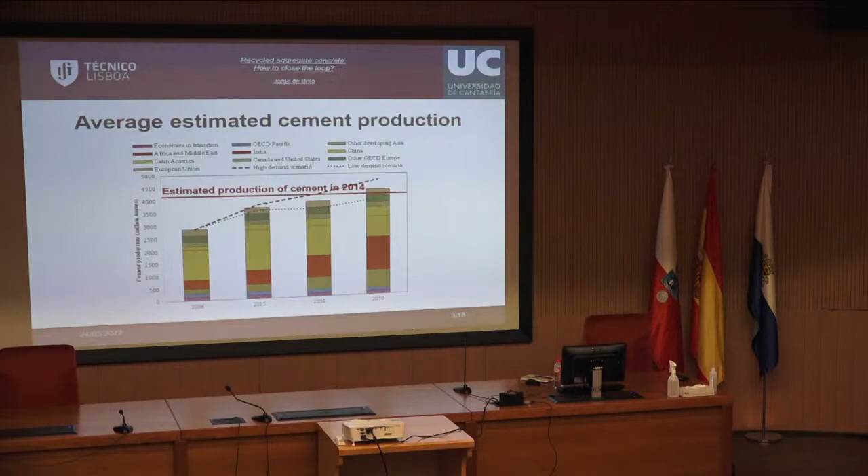This was the estimated cement production in 2014. As you can see, these estimations failed, and the real cement production is going to be higher than the worst predictions here. So we are expecting to produce even more cement than before, beyond all predictions, unless we do something about cement. That's why I mentioned the possibility of replacing cement with binders, ligantes, that have a lower environmental impact. That's something we have to think about.

Going back to aggregates, we see similar trends. This was a prediction, and as you can see, the necessities of aggregates are going to increase over time, with most of the bulk not coming from Western Europe, which is more or less stabilized, but mostly from China. Africa is going to also grow. So this is something we have to understand, that it's going to increase. Even though aggregates, in terms of environmental impacts and even costs of concrete, are relatively minor, they are still very big. So we also need to do something about that, and that's what I'm going to talk about.

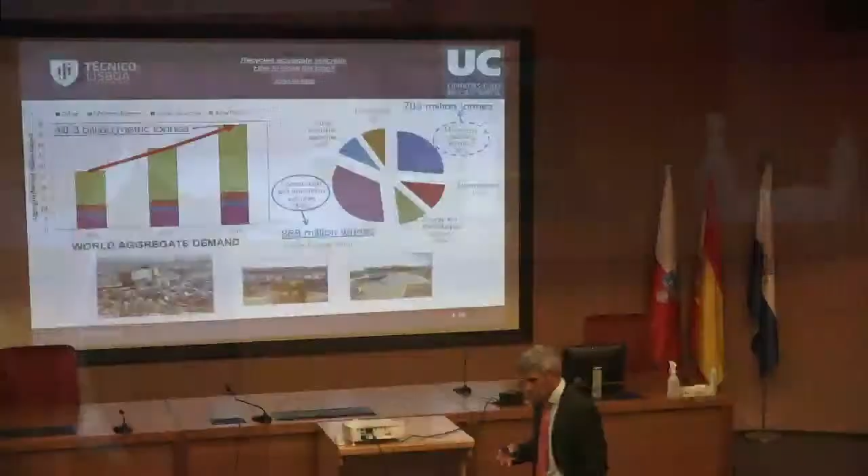Another issue I'm going to concentrate on a lot during this presentation is construction and demolition waste. Everybody knows what construction and demolition waste is, but what most people don't know is how important it is. Why? Because we keep getting lots of information about other types of waste, which are much more polluting than construction and demolition waste, and therefore get more attention. However, as you can see, the highest percentage of all waste comes from construction and demolition activities: 34% of all waste produced by humanity. Furthermore, mining and quarrying activities, quarrying as las pedreras, canteras, are responsible for another 27% of waste. So construction is really responsible for a lot of waste.

And should we use this waste to reduce the consumption of natural aggregates? Of course. Are we doing that? Well, no. That's what this conference is about. We are not doing that. We are not using in an effective way the huge amount of construction demolition waste that is being produced to reduce the necessity of using quarries.

Then we did this, which was a characterization and quantification of recycling processes. We looked at many recycling plants, and we made a comparison of methods, of the output, of the energy, of the actual quality of the materials they provided, and we did that for a number of recycling plants in Portugal.

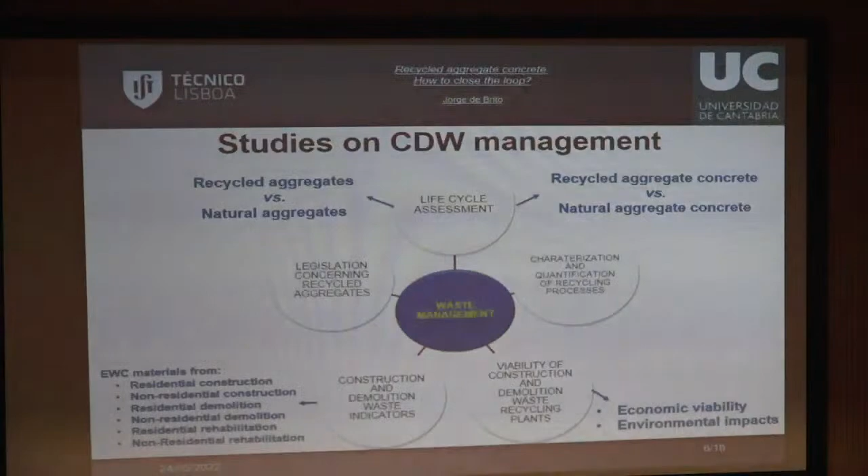We also did this study, which was very interesting. I think I have a couple of figures from that study, which was a study of the viability - do you understand viability? Well, it's almost the same in Spanish - so it's the viability of building a construction and demolition waste recycling plant in the area near Lisbon. So we concluded what was the best spot, and then we made an economic viability analysis and an environmental viability analysis.

We concluded that if we could put the recycling plant at full power, it would be a great idea in terms of costs, because it would pay off in 3 to 5 years, the whole investment, and in terms of environmental impacts it would be very good. It was never done. It stayed on paper and never went forward.

Then we also did - this is not in chronological order, these studies I have not been describing chronologically - we did a study that I have not seen before nor after, which was a study in which we built construction demolition waste indicators, for different types of construction: residential, residential office, and what was the other - I can't remember now. We also did rehabilitation, demolition, and construction, different, and we also analyzed, for example, whether the constructions were made of concrete, timber - madera, timber - stone, etc. And we provided indicators.

So then the main area in which we worked was this, as Professor Carlos Thomas said. We did lots of works in recycled aggregate concrete. Recycled aggregate concrete is not only concrete made from crushing concrete. This, of course, is the best solution. But in practical terms, we rarely get it, unless we use the waste from a recycling precast concrete plant. You understand? Prefabricación. Outside those places, normally concrete is not separated from the others. So most of the time we have these mixed recycled aggregates. We can also have separated masonry aggregates from bricks or from tiles. And we did that as well.

And we also did other materials. Some of them are obviously not the most adequate, such as plastic and rubber. The results are interesting. For example, rubber, it looks as if it will not work. However, it can provide some interesting properties in terms of the ductility. In seismic areas, it could be interesting because the rubber functions in such a way that it accumulates some of the energy from vibrations. So it could be interesting.

Glass is an excellent material for concrete, if we take into account the alkali-silica reaction. Do you know what the alkali-silica reaction is? It's a chemical reaction in which the alkali in cement react with the silica from the glass, and what happens is there is an expansion, and the silica turns into gel. So it's not very good for concrete. It cracks concrete and also makes it weaker. So as long as we have some care with that, it's a good solution.

And finally, we did an interesting study that I'm not going to present this time, Carlos, which was about using waste from the marble industry. Actually, we used all wastes from the marble industry. We used the coarse aggregates that result from broken pieces of marble that are not used. We used the fine aggregates as well, and we used the sludge. When cutting the stone, the dust becomes mixed with water, and they have these huge mountains of white dust which are not used for anything. And we investigated that, and all of these materials are viable to make concrete.

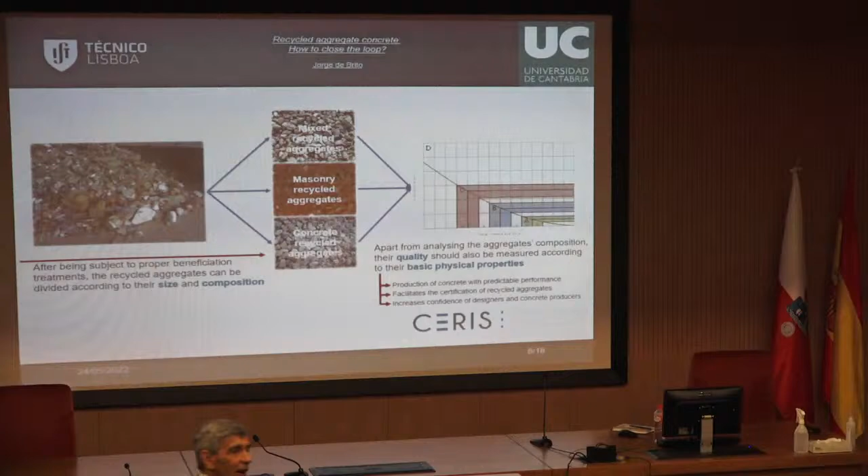Now, from this research, I'm going to highlight here a couple of cases. So what we did is we more or less understood that we could typify, we could have specific types of recycled aggregates. And the ones that were more interesting, because they are inert, come always in one of these groups. So there may be beneficiation treatments necessary.

Let me put here a parenthesis. I'm not for specific treatments of CDW. Because in most cases, the impacts and the costs of those treatments result in the fact that it is no longer interesting to recycle the aggregate. So if we are going to use recycled aggregates and we have to pay extra costs for that, maybe it's not a good idea. If we have to put environmental impacts because of, for example, chemical treatments, maybe not a good idea. Especially because afterwards we expect recycled aggregate concrete to have worse properties than the natural aggregate concrete. I'll see if I can talk about that later on.

Anyway, we decided that these are the main recycled aggregate types there are, and then we came up with an idea. And the idea was this, it's in this graph. Can we forget about today's ways of using the recycled aggregates, which is mostly based on classifications such as these? Can we forget about that and start using the recycled aggregates regardless of its source? I don't want to know what the source is. I am worried about the properties of the recycled aggregate.

And we chose two properties, which are the density and the water absorption. And we came to the conclusion that there was an excellent correlation between these two properties. And this is the line of correlation. And we also understood that the best aggregates were here and the worst aggregates were here. So we decided to propose this classification to classify all recycled aggregates. Did I say all recycled aggregates? Sorry, wrong. All aggregates. In my opinion, we don't have to call the aggregates names.

Do you understand this? This is a revolution. We don't have to say that the aggregates are recycled. Why do we need to say that? We just call them aggregates. And then we look at their properties here and we decide how good they are. Of course, natural aggregates are mostly here, but not necessarily.

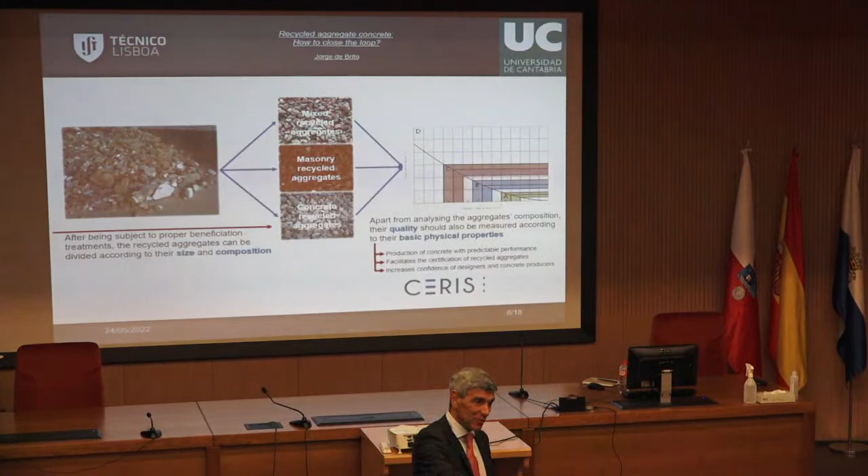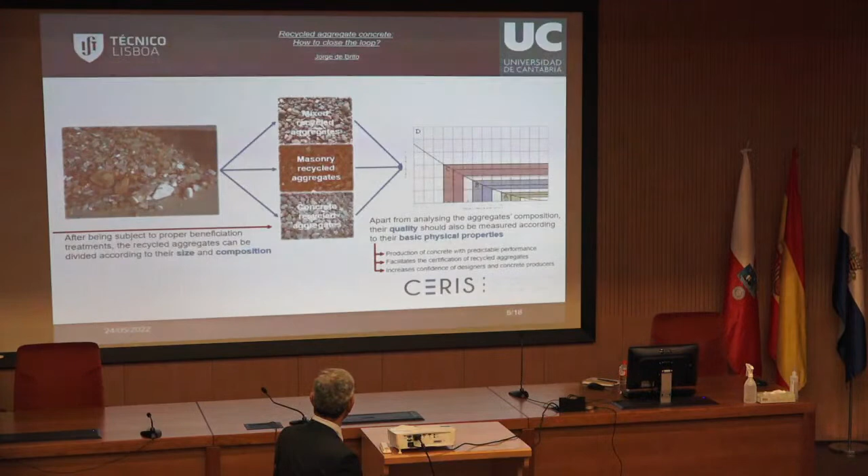We are using now natural aggregates that are over there, and no one is complaining. And many of the recycled concrete aggregates are here, or there, depending on the... So we do not need to know the source of the aggregates. We need to know their properties. Okay? This paper now has over 700 citations in Google Scholar, so it probably is not too bad. Okay.

We also concluded from that study of the Portuguese construction and demolition waste recycling plants that technologically, there is no reason why we can't use those. But of course, and we always need to think in those terms, the worse the recycled aggregate is, the less quantity we can use. Right? Does this make sense? So the worse the recycled aggregate is, the lower the replacement ratio can be.

Because it's all a matter not of the recycled aggregate that we put in, but of the resulting aggregate, which has natural and recycled aggregate. So this one is good, we can put lots of it, and the mix is still good. This one is bad, the recycled aggregate, so we can only use a little bit. But it's stupid to say that we can't use any of it.

Okay? Now, another taboo, do you understand taboo? Another taboo that we kept hearing is we can't do high strength concrete with recycled aggregates. Why? And so we decided in one specific PhD thesis, which was made by someone who is getting married next Saturday, to make 100 megapascal concrete with 0 natural aggregates. Not bad. 100 megapascal, 28-day compressive strength. 0 sand, 0 gravel.

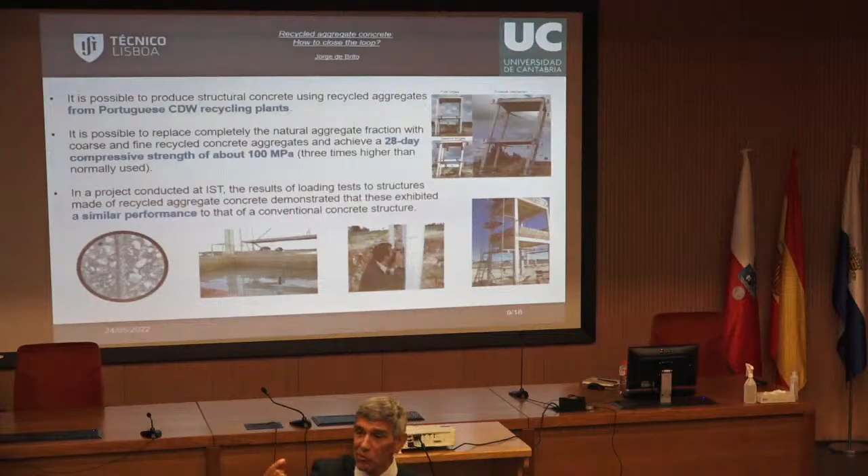0 grava, 0, como se diz? Arena, okay? None, 0. All 100%. Some of the regulations say that we cannot use even one little bit of sand, not one grain of sand, because the whole thing is going to collapse. We used only recycled sand. Of course, what's the secret? This was made with recycled aggregate only of very high quality, taken from the precast concrete plant, and it worked.

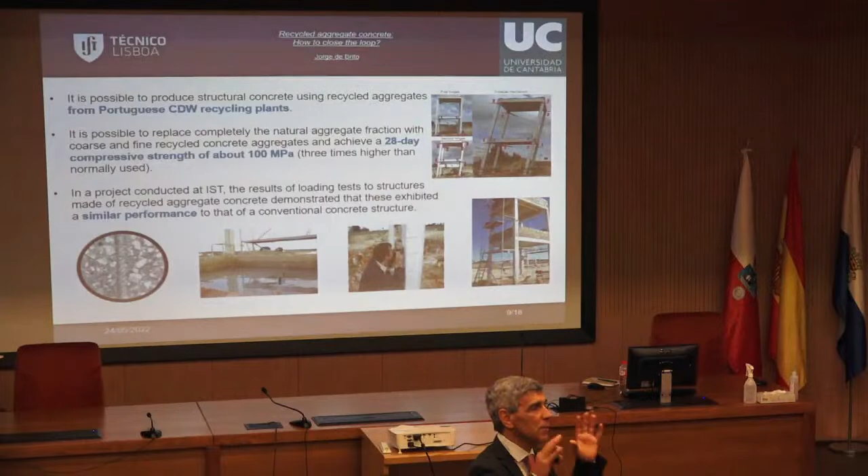Am I saying here that we should use 100% recycled aggregate in bridges? No. It was simply an exercise to demonstrate that many of the things that people keep saying about recycled are not true. So this was just a demonstration result. This one was also a demonstration. This is João Pacheco, who is still working with me. Do you remember João, Carlos? This was for his master's thesis. Then he did a PhD thesis, which is very, very good, on reliability.

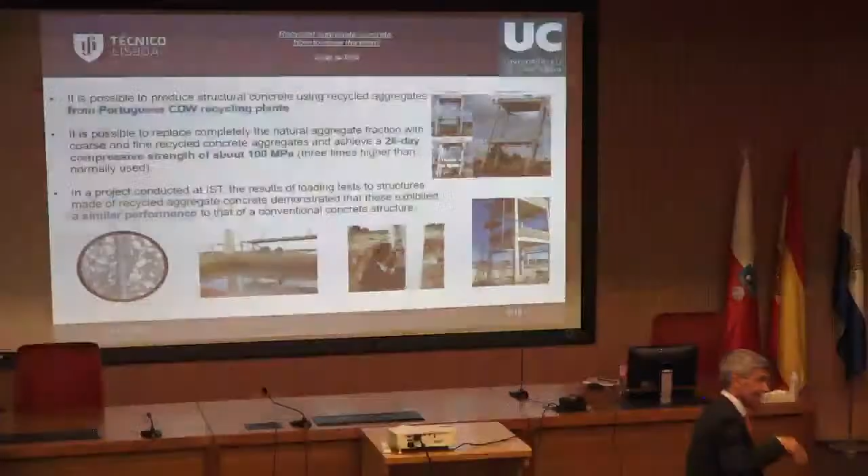And we built these structures, and we did all types of tests with them. Materials, static vertical load tests, static horizontal tests, characterization in situ. We did all of those things, and finally, we decided to tear down those structures. And we did 4 structures: one with conventional concrete, one with 25% recycled aggregate, one with 100% recycled aggregate, coarse only, and then 100% recycled aggregate

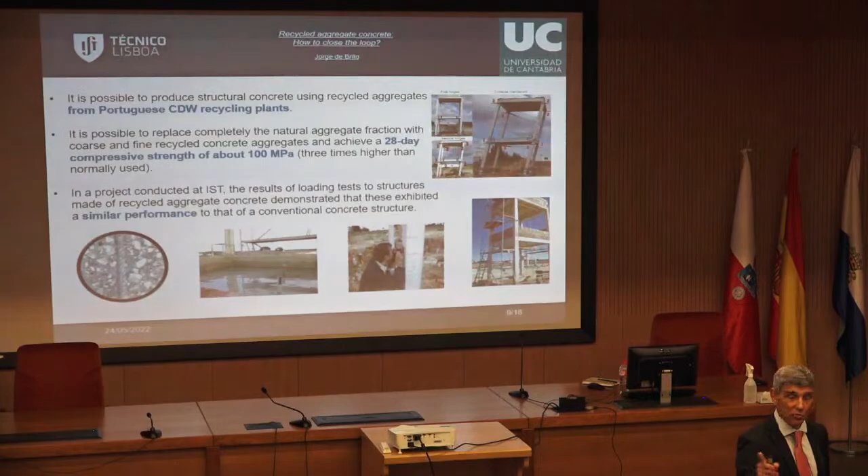with superplasticizers. And our conclusion was that even though there were differences in terms of the properties of concrete, the structural behavior of the structures was very similar. Which of you has experience in structural concrete design? You have? Okay. So those that have designed concrete all know that concrete has a very small influence on, say, the flexure capacity of a beam. Whenever there is flexure, what really conditions the behavior of reinforced structural concrete is the steel.

But we are also now working very much on several byproducts, in which these byproducts, instead of replacing the aggregates, the sand, are replacing the binder. And there we can have a great improvement in terms of environmental impact, even at the loss of some performance in terms of structural, in terms of mechanical behavior.

Again, my apologies. I like to introduce the subjects as they come to my mind. Most people think the environment is something that has only advantages. Saving the environment only has advantages. It's not so. In most situations, doing something that is less impacting in the environment is more costly. And it's a choice for us. We are the society. It's a choice for us to say we want to pay that cost. I could give you many examples of things in which what we are doing now is exactly that. We are paying more to have lower environmental impact. Almost always, the dirtiest way of doing things is the cheapest.

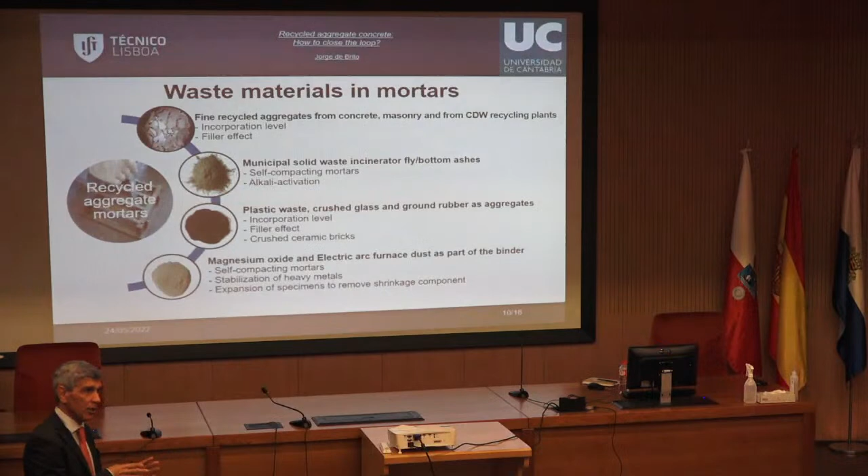So in terms of recycled aggregate concrete, you need to understand that by reducing the environmental impact, you normally get a reduction as well in terms of mechanical performance, which, as I demonstrated in the previous slide, is not necessarily important, but we need to keep that in mind. We cannot sell recycled aggregate concrete to people and say, oh, it's okay, there is no negative consequence. No, it's not true, it's not honest. And we need to send the right message. There is a cost to pay for recycling the aggregates in concrete.

Now we're going to the most important part of this presentation, which is what I mentioned at the beginning in the title, how to close the loop. Now, what do I mean by this? I don't know of any country in the world where recycled aggregate concrete is current, is what most people or many people do. No, that does not exist. To my knowledge, there is no country in the world where recycled aggregate concrete is used on a normal basis. So you go to an office and say, okay, design a recycled aggregate concrete building for me, please. And the guy says, okay, no problem, there you are. No, that does not exist.

And the recycled aggregates so far represent only 8% of the aggregates, even in the best countries. And almost all of those 8% is not in concrete. So we are talking here about the future, not the present. And I'm going to talk about why the situation is as it is and what we can do to remove the barriers. So I'm going to give you barriers and then I'm going to talk about solutions. Please feel free to lift your hand and ask whatever question you need.

So one of the barriers is this: inadequate segregation of waste at the source. Segregation is normally a bad word, but here it is what we need. If we do not segregate the materials, we only have mixed recycled aggregates, and their characteristics are worse. We cannot rely on them because they have not only lower characteristics, but also more variation in terms of characteristics. And that's the worst thing for designers and for concrete producers.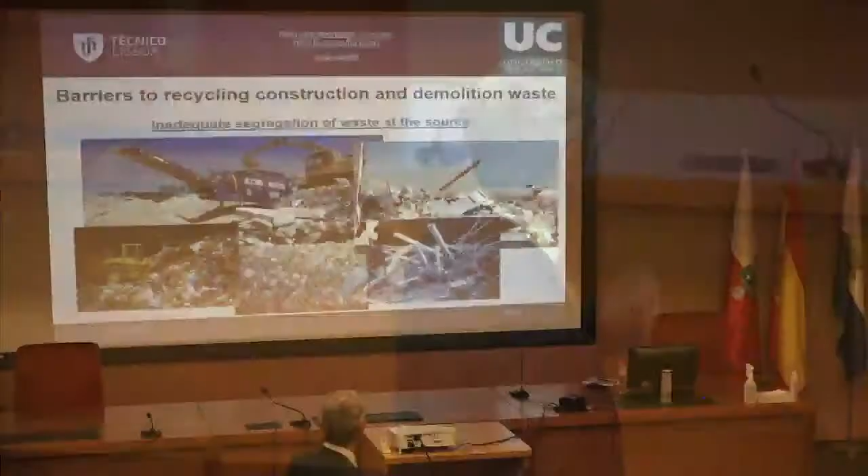Concrete producers do not mind knowing that they can use a material that is not so good, but it's consistently bad. Do you understand? So they know, oh, it's only 5 and it moves from 4 to 6. That's great. But if you tell them, oh, it's 10, but it can be from 5 to 30, they can't work with that. And that's the problem with the way we take care of the construction and demolition waste.

We go to a building, crash the building, the whole thing is over there, and then it looks something like this. And then what do we do with that? We send it to dumps, and we don't use it. So we need to separate, and then have inerts, preferably concrete separated from masonry, and then have all the other materials all separated. So what can we do about this, because this is common practice?

Okay, we can implement what I called selective demolition. Do you know what selective demolition is? No? It's demolishing the building in such a way that you can separate the different materials and have different places where to put them, and then you can collect them and send them to the right places.

So you have here a container with glass that you send to a glass recycling plant. You have another container with timber that you send for burning, and etc. Selective demolition. Why don't we do it? Why aren't we doing more selective demolition? Well, many reasons. The most important one is that it is more expensive. And it also takes more time to do it. So it's twice bad. It takes more time, and in the end, it's more expensive.

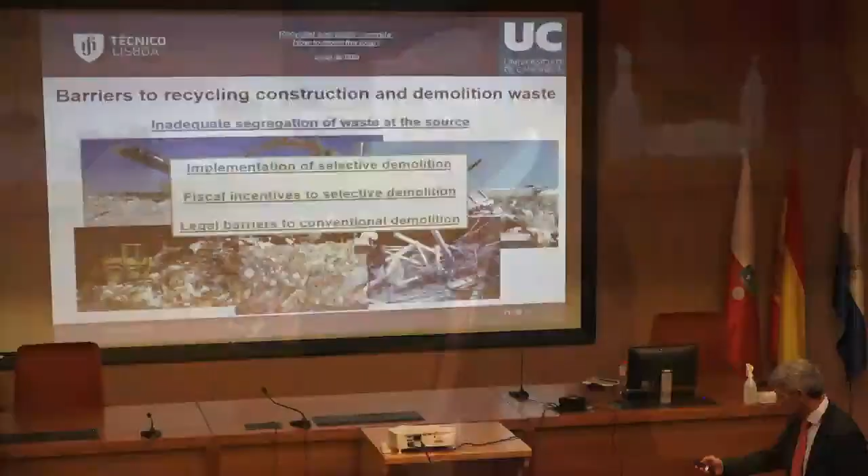But this is just part of the story. Why is it more expensive? Because people who do not do selective demolition just crash down the building, they then can take this, which everybody knows cannot be used, and dump it at very low prices.

What if there is heavy taxes on people dumping? So instead of dumping for €5 a ton, there came a law in which you were forced to pay €50 a ton. Then you start thinking, okay, I will separate, and then I will send it to the glass recycling plant, in which I get money. I don't pay, I receive money. I take it to somewhere where they sell very good aggregates. Maybe they give me a little money as well instead of paying. So when you put that all together, it starts paying off, and that's without taking into account environmental impacts.

If we converted environmental impacts into conventional costs - costs that we say each ton of waste taken in costs the environment - and we make up a number, €20, and we say if you want to do this, you have to pay €20, then the whole thing changes.

But we can do it in an even more drastic way, like this. We can use our taxes properly. And we can tell people, look, if you're going to do selective demolition - and we are going to check if it is actually selective demolition - we give you incentives in terms of taxes, money that you pay to the government, your firm. You pay less taxes if you do this. It starts becoming interesting.

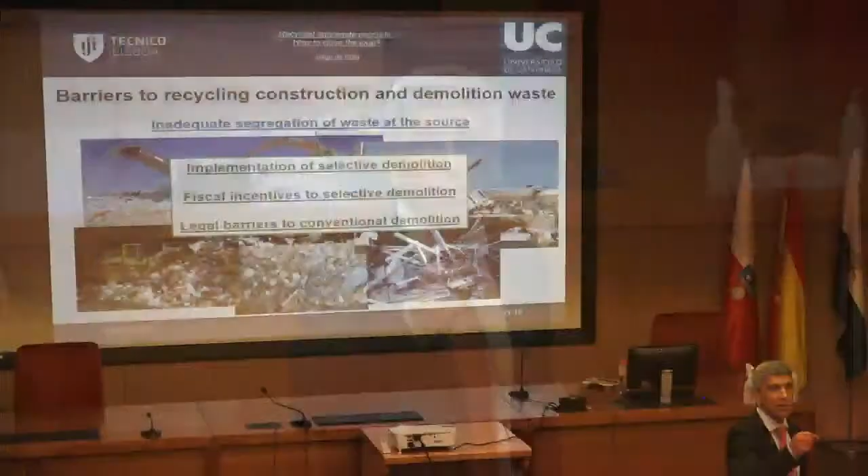We can also go in a different, even harder way, which is what some countries are doing. In some countries, it is no longer possible to do non-selective demolition because it is forbidden to dump construction demolition waste. Forbidden. No, but I pay 100. No, you cannot dump CDW. So imagine you are demolishing a building, and you know that you cannot dump mixed construction demolition waste. You only have one option, which is to do selective demolition.

It's again, society needs to make choices. Do we want to do this? Do we value the environment in such a way that we want to, because this will mean extra costs. Because you are demolishing the building and you are going to sell the flats to him. You are going to pay for the selective demolition because you're the final user. And is society ready for that? We need to ask ourselves, okay?

So let's move on. Please interrupt me because, Ignacio, you don't seem to be convinced.

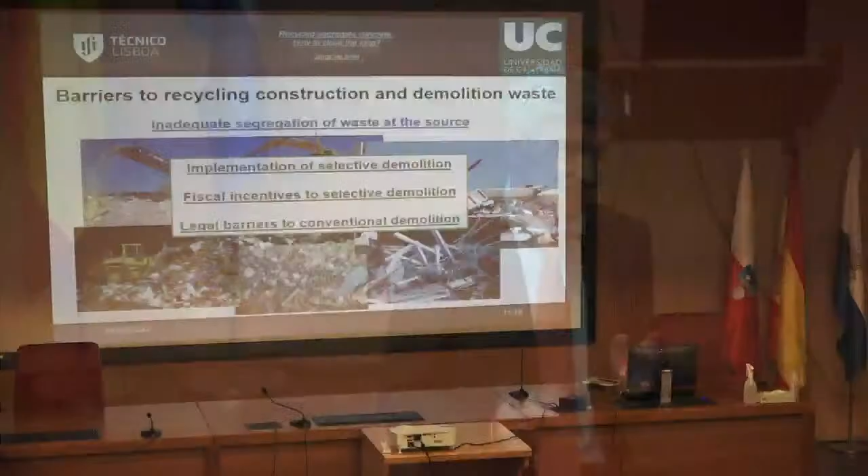Denmark, you cannot dump. Netherlands, same. And notice it's the places where they already recycle. Some of these guys are not more environmental than us. They have to be, and so they make as if they are very environmental, but they are not. The problem with you, you're Spanish, and with me, that I'm Portuguese, is something I'm going to talk about later on, which is natural aggregates are so cheap. The problem, did you understand? It's not good, it's the problem from this point of view.

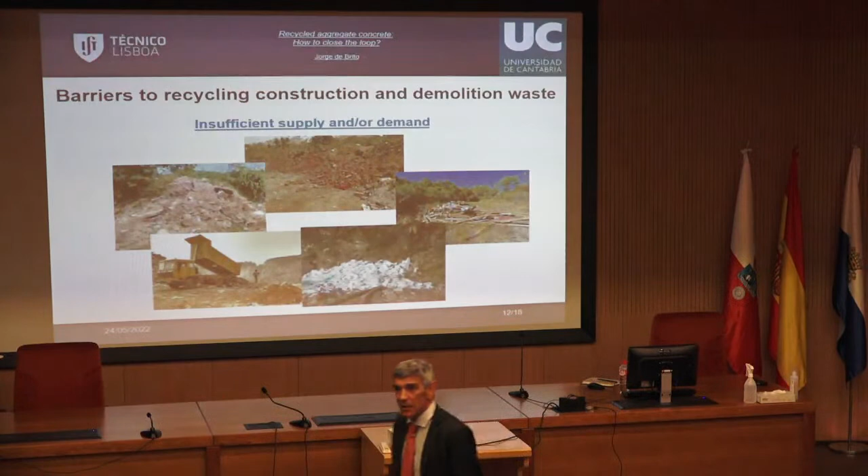Okay, let's move on. This is a very important issue: insufficient supply and/or demand. On the one hand, there are no people asking for recycled aggregates. You don't see construction companies desperate to get recycled aggregates, saying please give me recycled aggregates or sell me some. No, you don't see that. Which makes it less likely that there are recycling plants offering good quality recycled aggregates. So this is a vicious circle. You don't have demand, you don't have supply; you don't have supply, you don't have demand. How do we break this?

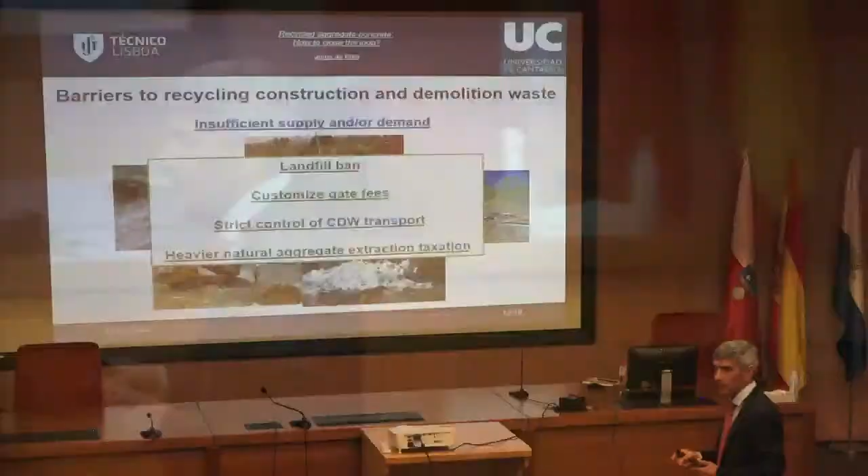Well, let's go for the atomic bomb, the one I mentioned just now: landfill ban.

You cannot dump construction demolition waste. You think, wow, these people will complain. They'll complain for 1 year, maybe 2 years, and then they get used to it. Remember what we said when the pandemic started? The things we thought were impossible, we can't stay at home, we can't use masks. But in the end we adapted. And that was for bad reasons.

This is for good reasons. So if we stop landfilling, immediately we change the whole thing. We start having a need to make selective demolition, and then we have to have places to take the separated materials. And next we have other issues where we can also change this situation from the point of view of demand. I'll talk about that later on.

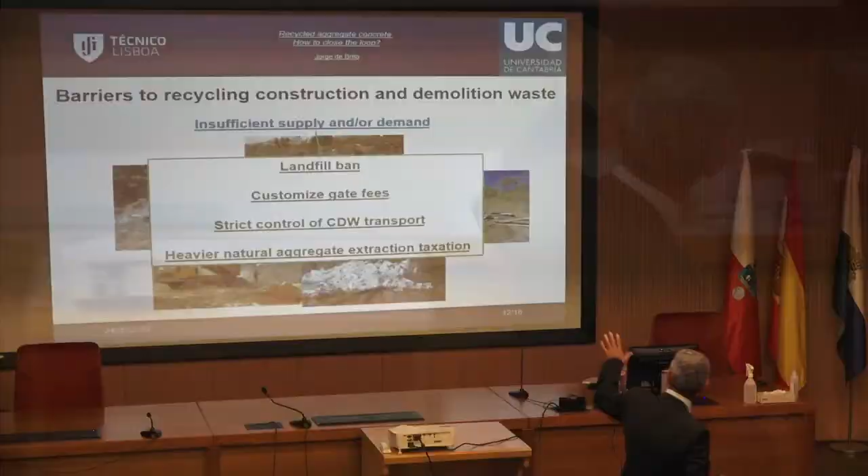Now, if we don't do the landfill ban, we could instead, softer, customize the gate fees. Gate fees is what you pay when you dump. We can make it compulsory for the recycling plants to ask their clients 100 euros per ton of mixed recycled aggregates, mixed construction demolition waste. They don't have a choice.

They would like to take it for 20 euros or something, which is what they're doing now, but the state tells them, no, you can't do that. Every ton that you receive, you need to demonstrate that you've received 100 euros from the people. Again, it changes the whole perspective.

We can also have, and this is very important, at least in Portugal, strict control of CDW transport. We see many times, near the roads, these dumps, right? Have you never seen these in Spain? So what if someone who does that gets arrested and gets 6 months in prison? What if someone who does that pays 50,000 euros?

Will they keep doing it? So you're saying it's too much. Well, sometimes to educate people, to educate children, you have to be a little bit strict. You have to say, you cannot do this. Oh, but I want to do it. Okay, you pay the price. This is not science fiction, it has been done.

Carlos here has roots from countries where things are strict. And I don't believe these people are more law-abiding than us. I believe they have more fear, because when they do it wrong, they really pay for it.

Example: Steffi Graf's father. He dodged taxes. Do you know what you call a tax dodger? People who try to avoid paying taxes, impuestos? What do you call a tax dodger in Germany? A criminal. What do you call a tax dodger in Portugal? A hero. What if that hero goes to prison? No more heroes.

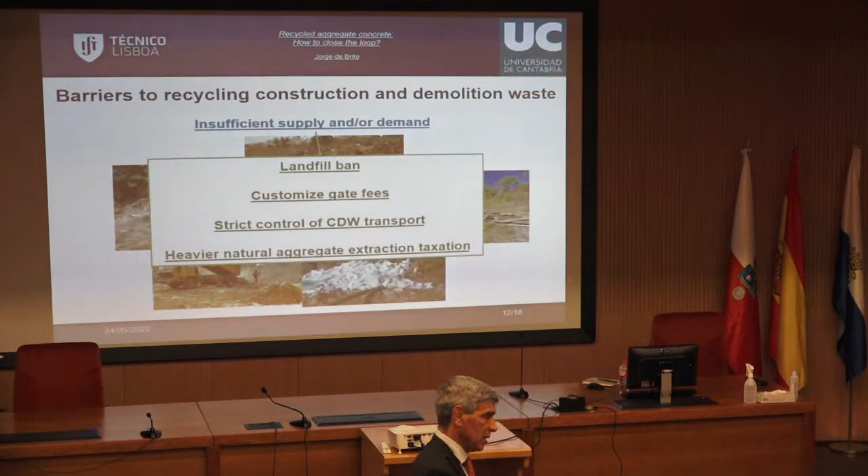So if, instead of what happens today, where we get natural aggregates for 3 to 5 euros a ton, and recycled aggregates maybe half of that, 2 euros or something, is it worth trying? No. But what if the natural aggregates cost 20 euros a ton? It would make a difference. So let's go on.

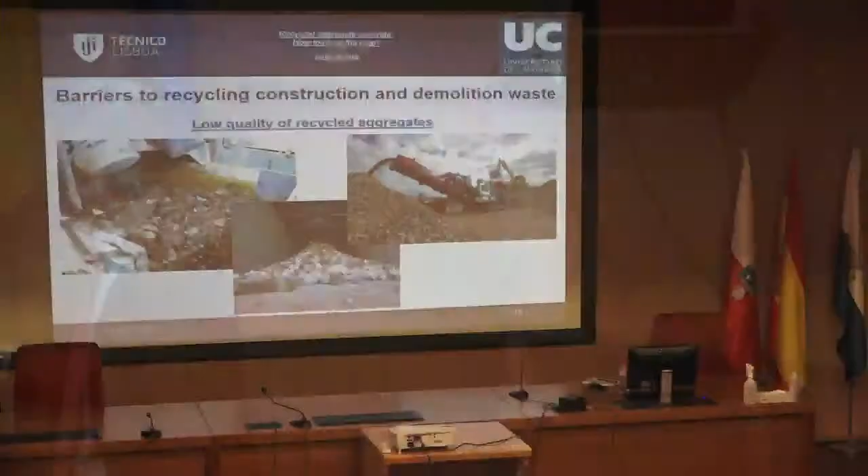Low quality of recycled aggregates. This is true, but it's more true today than it needs to be. Why? Because the aggregates we have look something like this. You can clearly see bricks here. Why is it like that?

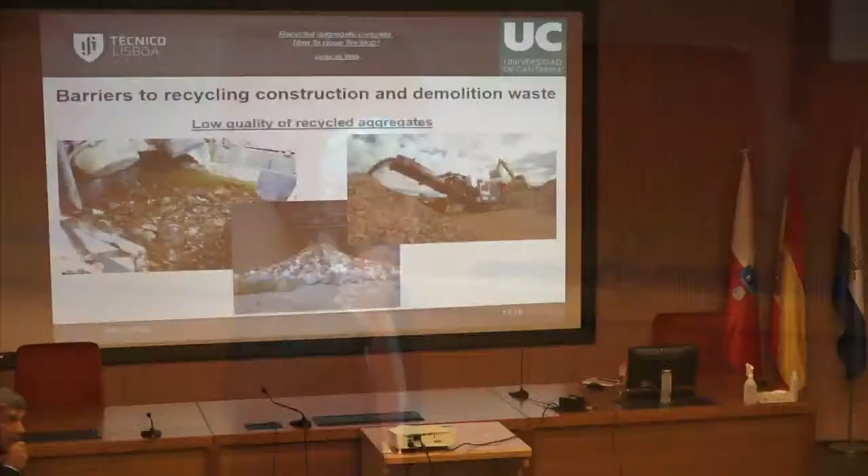Well, because it's not worth separating at the moment. It's too expensive. Didn't I say that natural aggregates are sold for 3 to 5 euros a ton? How much can they ask for these recycled ones if they want to sell them, especially in a country where second-hand things are considered bad by nature? It's in our culture.

In the UK, no problem with second-hand. In Portugal, because we are much richer than the UK, we don't take second-hand. We don't use second-hand clothes, second-hand shoes, and especially we do not use second-hand recycled aggregates. So if you're going to sell these, you have to sell it for 2 euros a ton, otherwise no one is going to buy it. You cannot separate for 2 euros a ton.

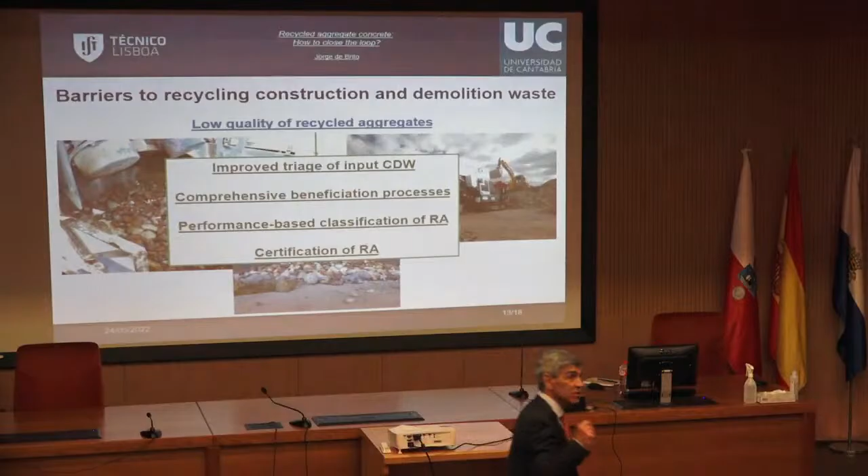Right, okay? So let's now see what we can do: improved triage. Triage is separation of input CDW. This is connected to many of the things I've said: selective demolition, the fact that it needs to be economically feasible, and the need to have the right equipment at the recycling plant to do this, and sometimes at the demolition site. So improved separation is one thing.

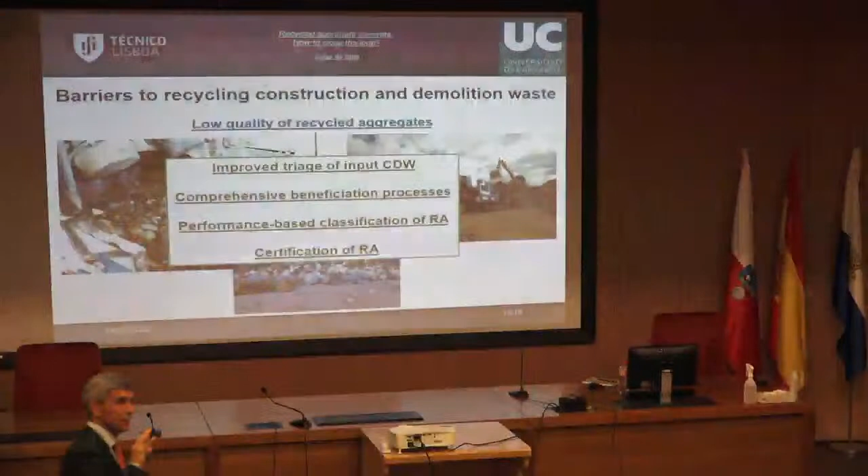Comprehensive beneficiation processes. There are some processes that are not too expensive to do, but they still make a big improvement. For example, wind blowing and getting rid of plastic and other very light materials, it works. The magnets to get out and separate the metal materials. So there are some beneficiation processes that are cost effective.

Now this is another thing that I already mentioned: performance-based classification of recycled aggregates. Instead of calling the aggregates names, this is recycled aggregate - recycled is a bad word, it does not sound good, you don't want something recycled, right? What if I don't tell you that it is recycled? What if I give you the properties of the materials? And by chance, 50% of what you're getting is recycled. But the important part is that you have the aggregates classified in terms of performance, not in terms of source.

It's a little bit, I don't know if this is a good comparison, but it's a little bit like race. It's not relevant, the race that we have. What is relevant is what we do, how we perform. Here it's the same thing. So we are advocating performance-based classification. And then there's certification, because this is the real problem of concrete producers - they have to have their materials certified.

What if, by several of these measures that I mentioned here, concrete producers need to have recycled aggregates? We'll talk about that later on. What if they need to have recycled aggregates in concrete? Then there is a market for recycled aggregates of a given quality - not any recycled aggregates, but of a given quality. And then there's going to be people who have recycling plants that will make whatever is necessary to guarantee that their materials are certified and can be sold to the mixed producers, concrete mix producers. So it's all connected. You need to give the right incentives.

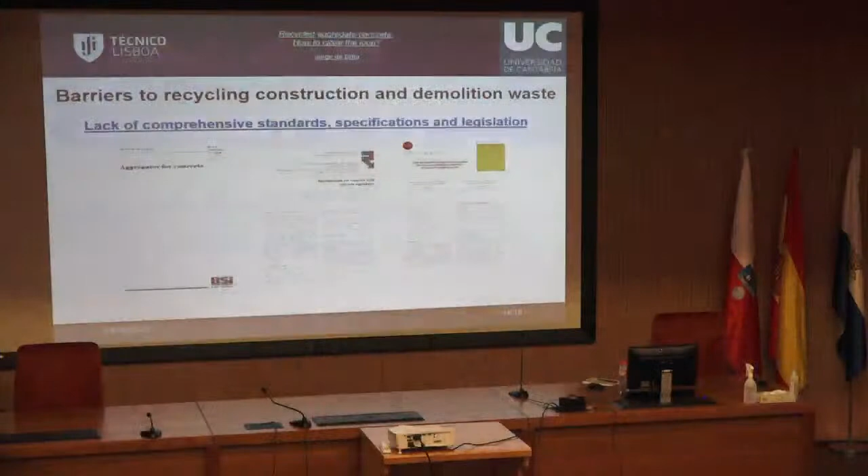Now let's look at this from the perspective of the designers. I was a concrete designer for 15 years, and I know of very few people who are more conservative than the designers of structures. They would prefer to live in the Middle Age, not to change anything. From their point of view, if codes could stay forever the same, great. New materials, no way. Materials that we don't know about, no way. So their perspective is very, very...

So I have lots of colleagues in my school. They tell me, look, Jorge, I'm convinced that these materials can be used. Show me how I can use them without risk. That's what they have. And I tell them, what do you consider risk? Oh, I know the scatter - they have a huge scatter of properties. Yes.

And I ask, what about natural aggregates? No scatter. What do you mean no scatter? No scatter? Let me show you this. And then they have the nightmares.

Okay, because for example, concrete made with sandstone - both of you have designed concrete structures, right? Did you know that concrete made with sandstone, natural aggregate, has 70% of the expected modulus of elasticity of a granite-made concrete? Did you know this? No. Neither do my colleagues. They believe that natural aggregates are all the same, that they have exactly the same properties.

So people do not know about this, but I understand them. So what can we do to take into account the fact that there is a lack of comprehensive standards, specifications and legislation? For example, there is the specification of the National Laboratory of Civil Engineering, and two other documents, one from British Standards and the other from RILEM. None of them are very helpful. Maybe the one that is more helpful is LNEC, but I'll make a comment about that.

So we need to update existing specifications, namely those that do not consider the possibility of having recycled aggregates. There are many that don't have that possibility. We need to update those standards with the knowledge that we now have.

And we need to change totally, and this is even more important if we are going to change the binder, because changing the binder will have a much larger impact. If you're going to change the binder, all of the laws that we have do not apply. Do you understand?

If you are going to use concrete in which 70% of the cement has been replaced with limestone and fly ash, which is already done, then the properties are not the same. Furthermore, the compressive strength does not relate to the modulus of elasticity in the same way. So we cannot just say, oh, the compressive strength, the strength class is this, so we know everything else. It does not work like that.

So we need to change, and this is being done, by the way, to performance-based specifications. Now it's going to be allowed to have any type of composition as long as you test it and demonstrate that the properties are these, and then you can use these properties to make your design. It's not as simple as this, but this is the general idea.

And of course, we need universal specifications for the use of recycled aggregate in concrete. What do I mean by universal? I mean that we do not have to call the aggregates names. As we stand right now, I can demonstrate that our specifications are wrong, just for the simple fact that they do not consider the type of aggregate that we are using. And I'm talking about natural.

There is a paper that we have published in which we question today's ways of defining the compressive strength of concrete. The paper shows that, as you know, there are several methods of guessing the compressive strength through the composition, and they fail by a lot if we change the aggregates. They work more or less with a given type of aggregate, but if you change the aggregate, they fail by a lot. So we are making those compositions, and we are expecting to have 32, and we get 25, or we get 40. And none of this situation is good.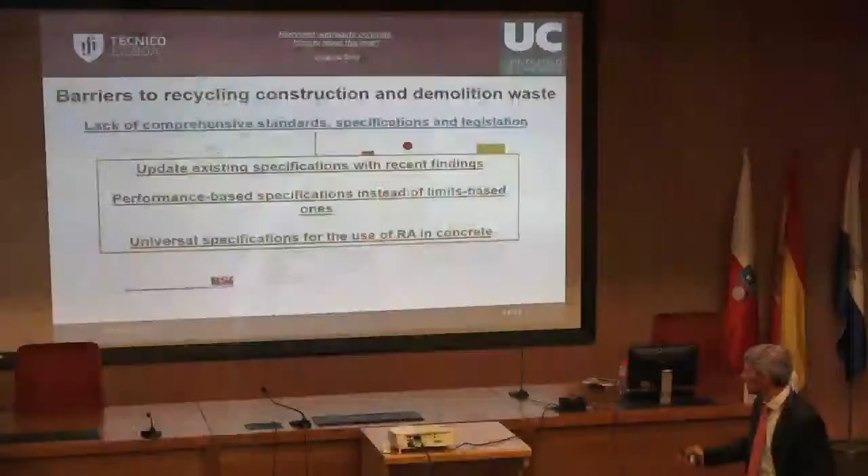So I'm hoping that we will have specifications in which there is some influence of the type of aggregate on the properties. I see that people are leaving, so I'll have to accelerate a little bit.

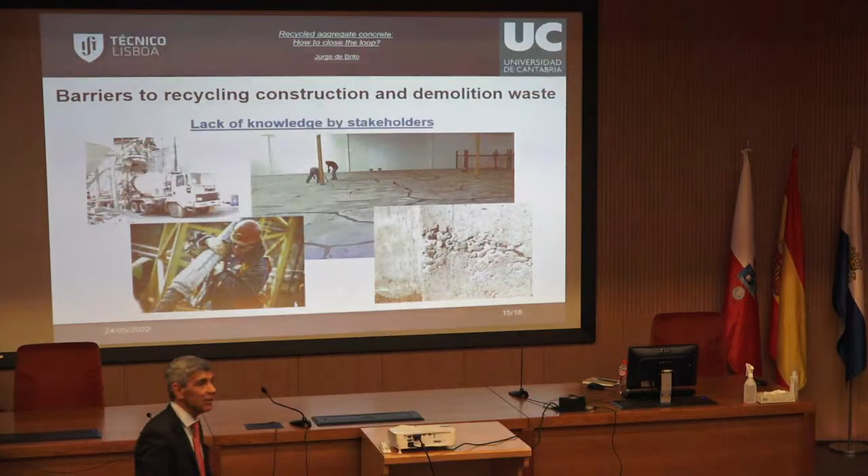The lack of knowledge by stakeholders. I've already been talking about this. Many of the stakeholders, namely the designers, are very ignorant about the materials they are using. So, what can we do about that?

Well, to start with, we need to have green marketing. We need to convince the people that are going to use it, the promoters, that it is good and they do not have big risks by using recycled aggregate concrete. Saying that they do not have big risks is not lying. That's not what I'm saying. It's explaining exactly what is happening. There's no big difference between what we are doing at the moment and using recycled aggregate concrete.

We need to increase the number of real scale applications. In Switzerland, they are already doing a relatively large number of real scale applications in which they are using recycled aggregates. Have you heard of many people dying from buildings falling in Switzerland? No. So it's okay.

And then we need, and this is for us to do, to create specialized courses. We need to explain to people not only the new standards that are going to come up with ways of making it possible to use recycled aggregate concrete, but we also need to give education to those structural engineers that have been educated a long time ago, so that they understand what they need to do to start using recycled aggregate concrete. I believe this is the end of these measures.

Okay, now this is simply a list of some research that, in my opinion, needs to be made. So we need to improve the quality control of the supply chain of aggregates.

This is true also for natural aggregates, by the way. We need to improve this to have more confidence in the properties of the materials and the properties of the concrete. We have worked on this already. We need to have multi-criteria optimization of the use of concrete.

Why? Because in the studies that we have done, the studies of Rawaz Kurda, we came to the conclusion that if we analyze different types of concrete with different binders and different aggregates, some of the properties went up and some of the properties went down. So we need to have tools to say, okay, if the environment has been improved and the compressive strength has decreased, which is better?

So how do I go about this? By the way, I truly believe we will have weaker structures in the future. Not for bridges, not for large-scale structures. For normal buildings, for houses, we have been guaranteeing durability at the cost of improving compressive strength.

You all know about this because near the sea you have to have a very high strength class. Why? To do a house, one story, and you need a C45... what's the one before 50, 60? What's the strength class before 50, 60? I can't remember now, so it's 37, 45, something like that.

We need to have a very large, very strong concrete by the sea. Why? Because it's the indirect way - a strong concrete is also a less permeable concrete. This is true, Paulo. We are using very strong concrete near the sea because that's the way to guarantee durability. And that is very stupid.

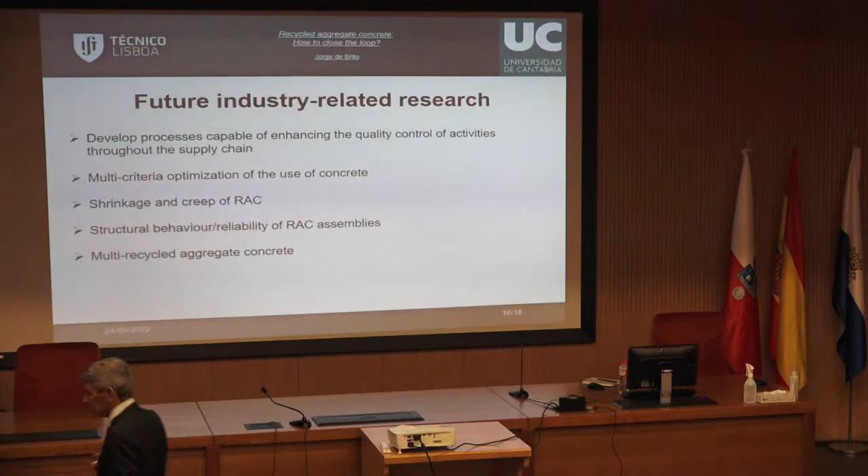Then, the shrinkage and creep of recycled aggregate concrete are one of the weak points of recycled aggregate concrete. We need to know more about this. It's one of the weak points. We are working on this as well. The structural behavior, sorry.

The structural behavior and reliability of structures made of recycled aggregate concrete - João Pacheco is working on this. And we have worked together with Professor Carlos Thomas also on multi-recycled aggregate concrete. Why do we need that?

Because the future is not just tomorrow. The future is in 100 years. Why don't we recycle concrete indefinitely? Do you understand what I mean? So we already have all the houses that we need. I hope that the world population does not keep on increasing. Okay, so let's suppose that the world population stabilizes.

We create housing for all of these people. From then on, we don't need to have more housing, we only need to replace housing. Why don't we use the concrete made from one house to make a new house for the same person? Does it make sense to you? So we need to understand what happens when we recycle and recycle and recycle.

By the way, unlike what most people think, if it were not for durability and for steel - not concrete, steel - our houses could be designed for 200 years, 300 years. Concrete, unless in very few situations, is almost eternal. We have concrete in Rome at the Pantheon, 2000 and something years old, still there. What is the difference between that concrete and today's concrete?

Well, different binders - it's pozzolan concrete - but that's not the point. The point is there is no reinforcement. 95% of the durability problems of concrete structures have to do with steel. So, let's move on, because this is the last slide.

And this results from an analysis case by case, and changing many societal conditions in order to start using the waste in a better way. What we cannot accept is that we keep on throwing away resources made of materials the way we do now. We have these huge quantities of construction demolition waste, and we use most of it for landfill. It's not acceptable, okay? But as you saw, there are many things that need to be changed, and I'll give you an example that would work perfectly.